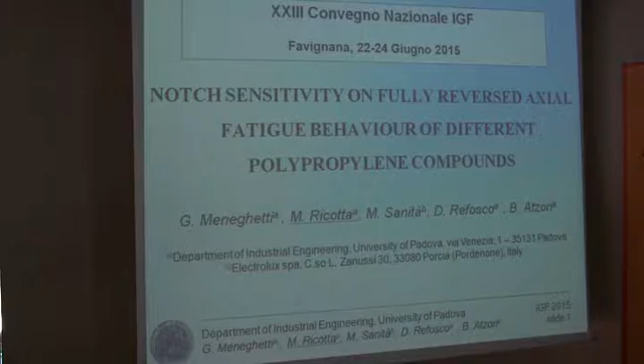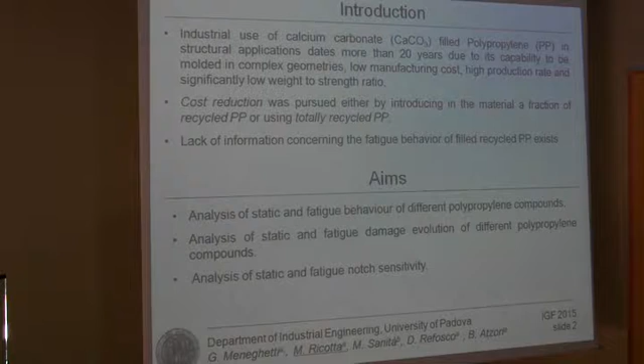The industrial use of calcium carbonate filled polypropylene in structural applications dates back more than 20 years, thanks to its capability to be molded in complex geometry, low manufacturing costs, and so on. Recently, cost reduction was achieved by introducing a fraction of recycled polypropylene or using totally recycled polypropylene.

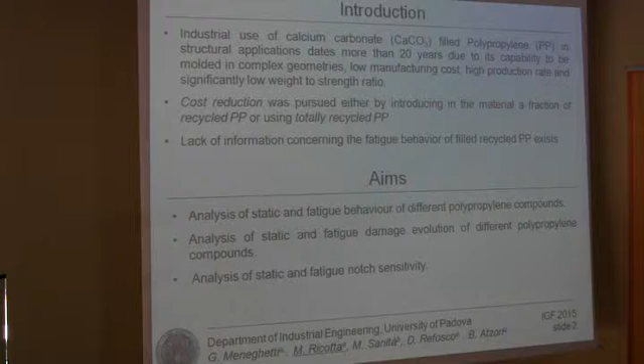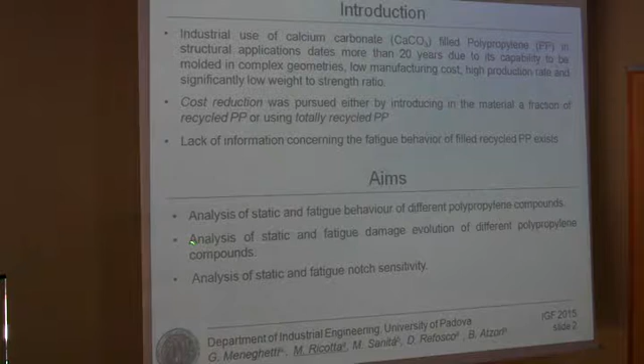However, in the technical literature there is little data about the fatigue behavior of recycled polypropylene. Therefore, the aims of this work were to analyze the static and fatigue behavior of different polypropylene compounds, the static and fatigue damage evolution of different types of polypropylene, and finally the static and fatigue notch sensitivity.

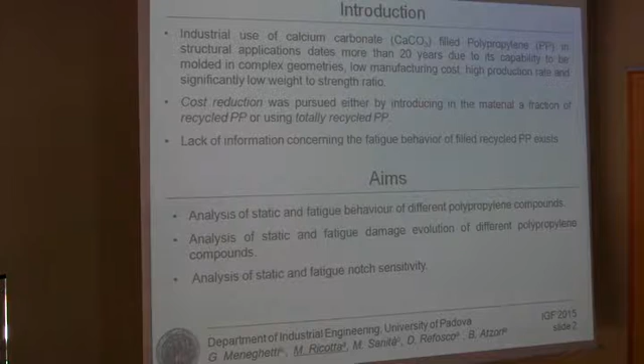Three different materials were investigated: a 42% weight calcium carbonate filled polypropylene, here named EA209; a 42% weight calcium carbonate filled polypropylene adding 25% of recycled polypropylene, here named R2025; and finally a filled calcium carbonate totally recycled polypropylene, here named R2100.

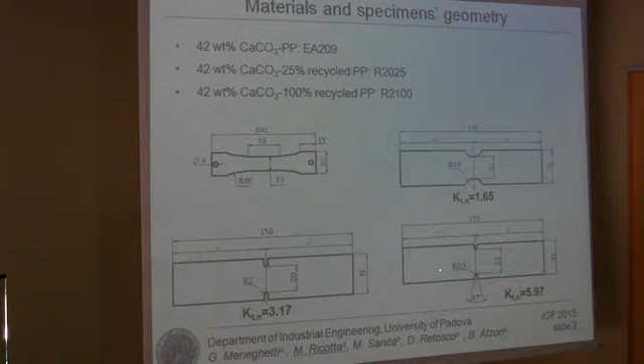The notch sensitivity was investigated using three different geometries: a 10 mm radius semicircular notch, a 2 mm radius U notch, and a 0.5 mm radius U notch.

Test conditions: we performed tensile static tests under displacement control according to international standards, and fatigue tests under load control by imposing a load ratio equal to -1, that means push-pull fatigue.

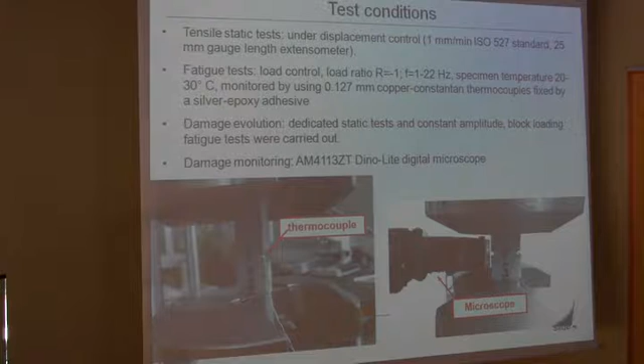The test frequency ranged between 1 and 22 Hz depending on the applied stress amplitude, in order to maintain the material temperature below 30 degrees.

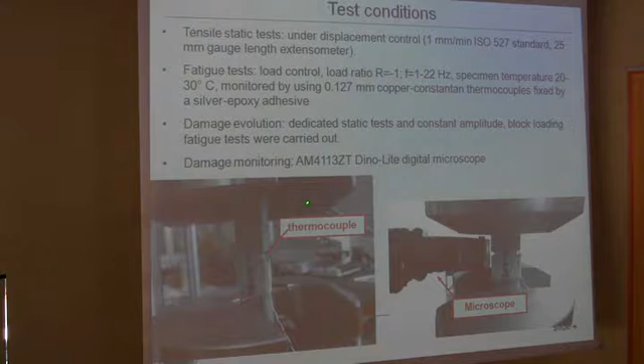The temperature was monitored by gluing a thermocouple at the notch tip, and the damage evolution was investigated by carrying out dedicated tensile, static, and constant amplitude fatigue tests, with damage monitored onboard using a digital microscope.

In this slide we show a typical stress-strain curve, and the main mechanical material properties are summarized in this slide.

We found a 20% reduction in elastic modulus in the case of completely recycled polypropylene with respect to the original filled polypropylene.

The same decrease in yield strength was found, 19%, in the case of fully recycled polypropylene with respect to the EA209 material.

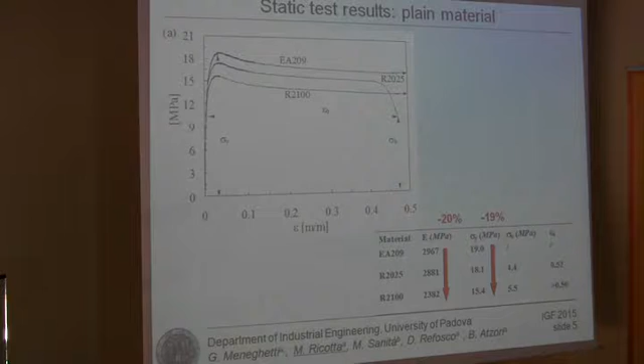This table summarizes the results obtained for notched specimens, keeping in mind that the theoretical stress concentration factor increases to 3.6 when reducing the notch radius from 10 mm to 0.5 mm. We can see that in the case of the first material, the yield strength is practically constant from an engineering point of view.

If we define this simple ratio, the yield strength evaluated at 10 mm with respect to that evaluated at 0.5 mm, this ratio is practically 1.

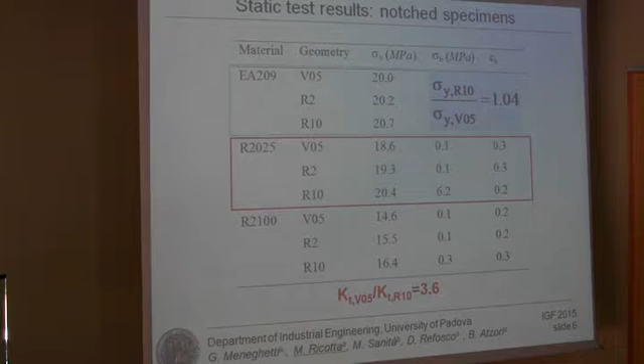Similar results were found also in the case of the R2025 material, that means having 25% of recycled polypropylene, and we can see that the same ratio is equal to 1.1.

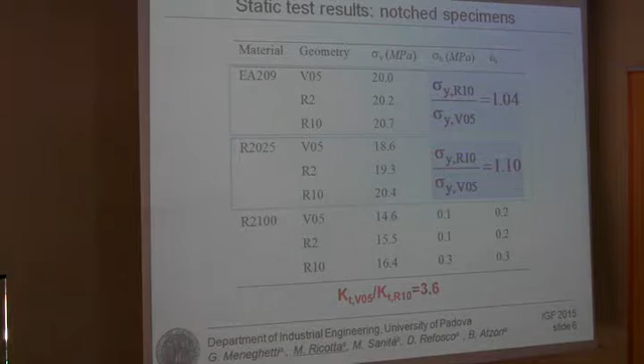Also in the case of totally recycled polypropylene, the ratio was equal to 1.12. Therefore, all tested materials resulted practically insensitive to notches in the case of static tests.

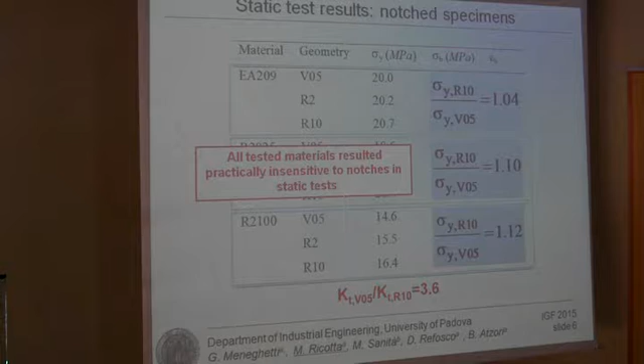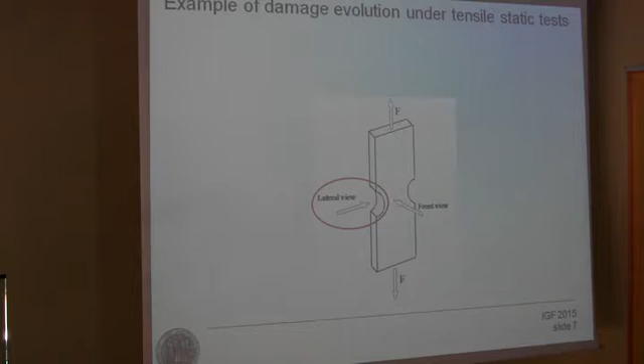In order to understand the damage evolution in static tests, we observed the specimen from two different points of view: a lateral view, looking inside the notch tip, and a front view. We found that the main useful results came from observing the specimen from the lateral view, as shown in this example.

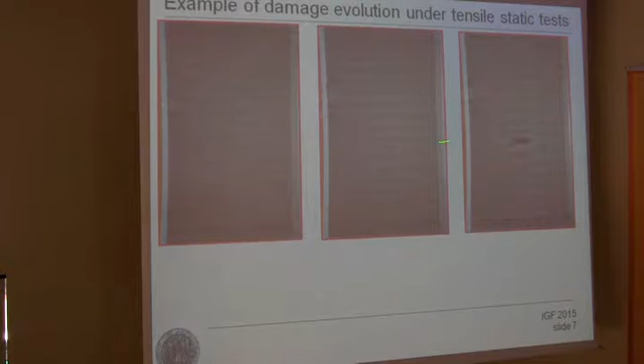This is the completely recycled polypropylene with a 10 millimeter notch radius, showing the notch tip from the lateral view. We can see that damage evolution starts with several small voids, some of which grow and join together to form a single big void.

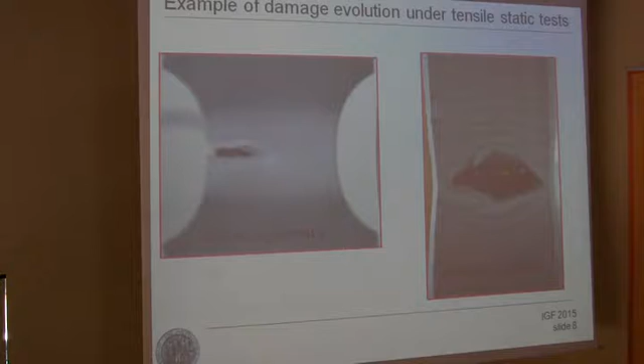As shown in this slide, when the specimen is not completely broken, this big void passes completely through the width of the specimen. In fact, you can see light coming from the opposite side, and this final mechanism, the big void, causes the final failure of the specimen.

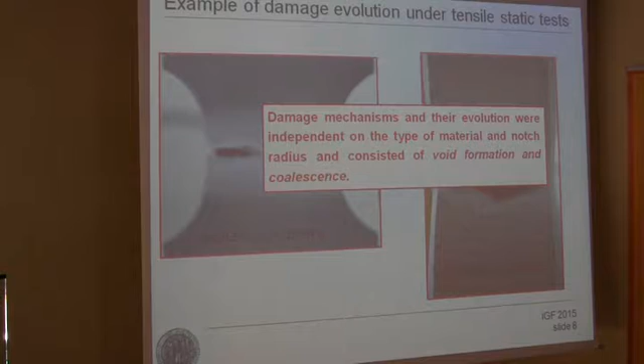This type of observation was carried out for all materials analyzed and for all notches, and we can conclude that the damage mechanism and its evolution were independent of the type of material and notch radius, consisting in void formation and coalescence at the crack tip.

We can see that the unrecycled polypropylene can be analyzed as a single series with the 25% polypropylene, and we have found a reference fatigue strength evaluated at 2 million cycles equal to 11.2 megapascal. Otherwise, the completely recycled polypropylene was analyzed as a single series, and the reference fatigue strength evaluated at 2 million cycles was equal to 9.78 megapascal.

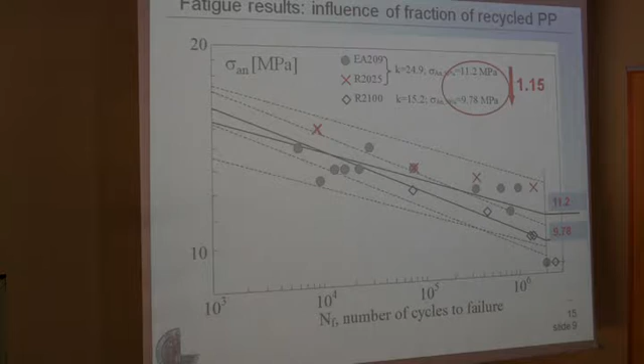Here, the first figure represents the fatigue results available at the moment in the case of completely unrecycled material. We can see that the specimens having 2 or 10 millimeter notch radius can be considered as a single series, while the 0.5 millimeter notch radius, due to the small number of data available at the moment, were not statistically analyzed.

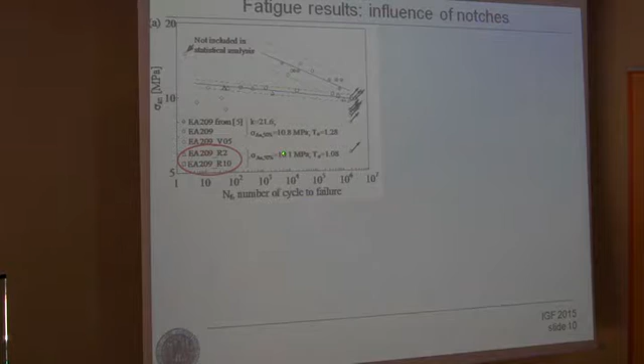At 2 million cycles, if we compare the fatigue strength in the case of plain and notched material, we can see that practically this material is notch insensitive, at least at high cycle fatigue life.

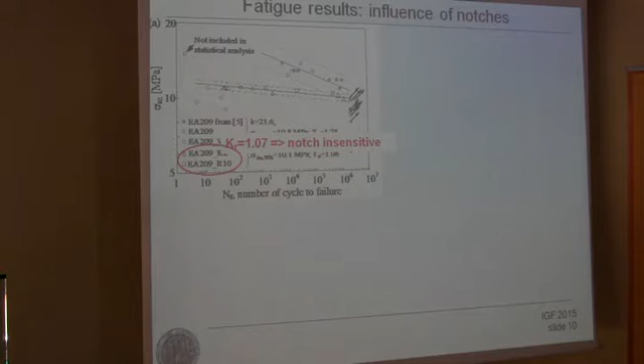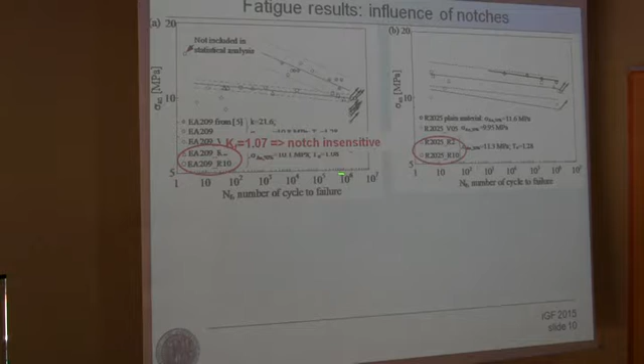Similar results were found also in the case of 25% recycled polypropylene. Also in this case, we have considered as a single series the notches having 2 millimeters and 10 millimeters radius, and we have found a reference fatigue strength equal to 11.3 megapascal. That means a reduction factor due to notch equal to practically 1.

That means also in this case that the material is notch insensitive, while in the case of 0.5 millimeter notch radius, the reduction factor calculated with respect to the plain material was equal to

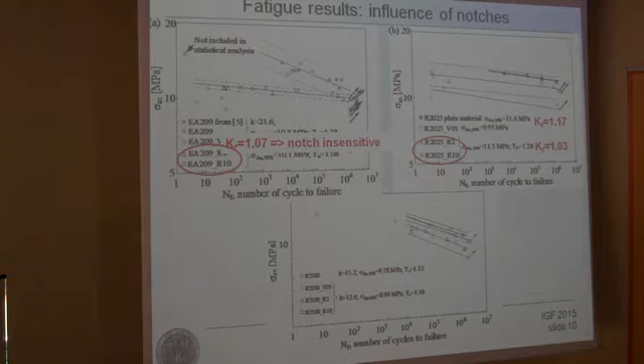1.17. Finally, in the case of completely recycled polypropylene, we can observe that the 3 notches can be considered as a single series from a statistical point of view, and therefore we have calculated the reference fatigue strength evaluated at 2 million cycles equal to 8 megapascal, and therefore we have calculated a reduction factor with respect to the plain material equal to 1.22.

Therefore, we can conclude that in the case of completely recycled polypropylene, there is a small but not negligible influence of notch.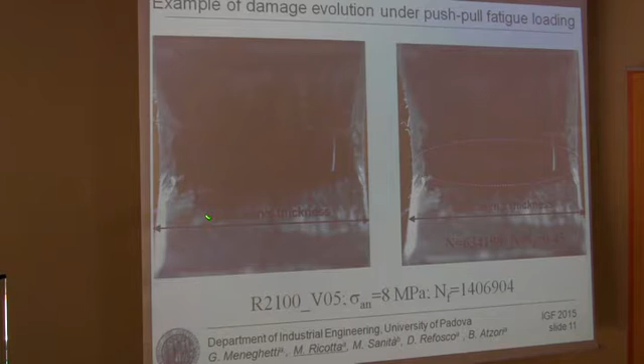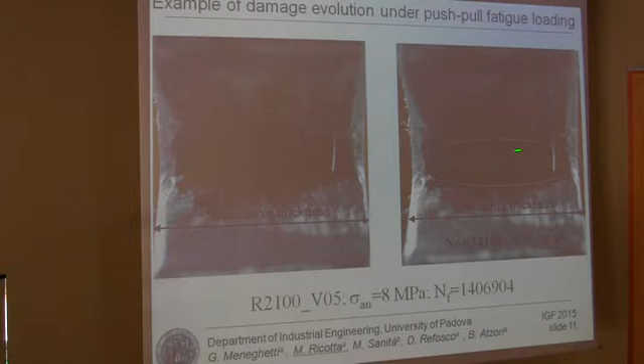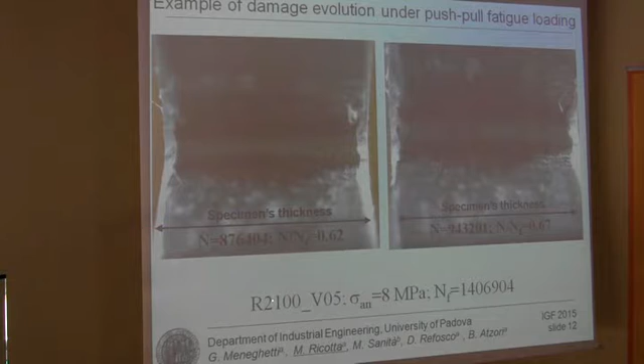This is the specimen thickness. This is the notch tip, and the damage evolution consists of material whitening at the notch tip, proceeding during the test. This is an example in the case of completely recycled material and 0.5 millimeter notch radius.

In the case of high cycle fatigue, we can see that whitening propagates completely through the thickness at about 70% of the total fatigue life.

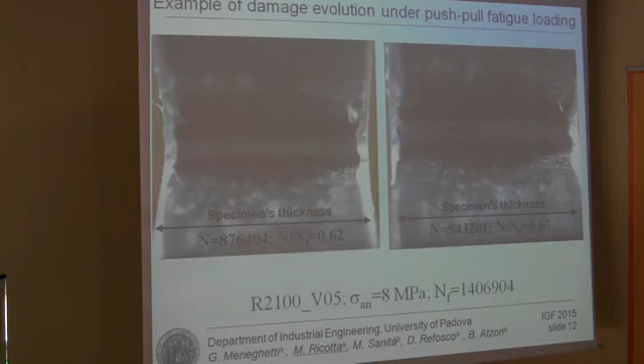We can see the formation of elongated voids in the thickness direction, which propagate mainly through the thickness, and finally there is a sort of big void with area length equal to the specimen's thickness.

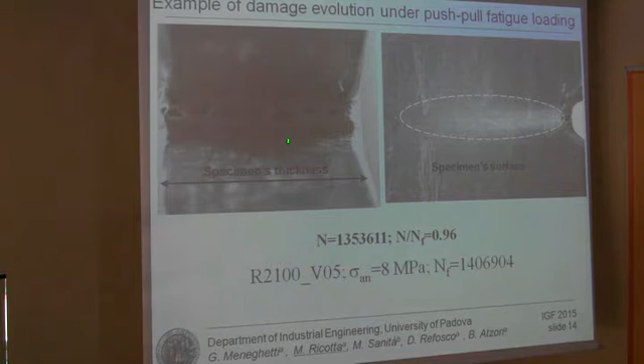If we look at the same picture taken from lateral view and from the specimen surface, we can see that this crack is not detectable from the specimen surface, only a material whitening. Therefore, it's fundamental in order to understand the damage evolution to observe it from the lateral view, because from the specimen surface we don't get the complete idea of what happens inside the material.

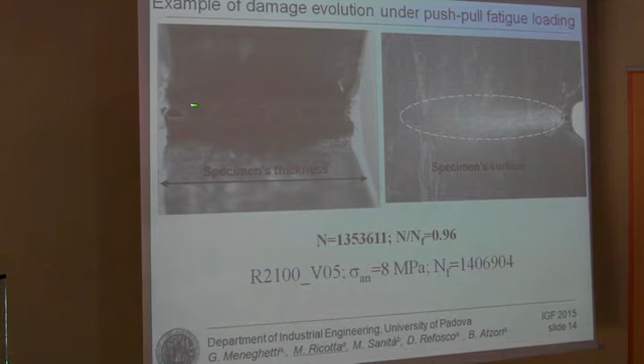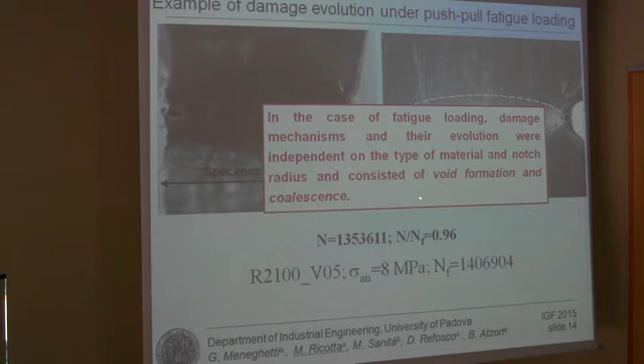We have performed this type of analysis for the three materials analyzed here, and also for all the notches. We can conclude that also in the case of fatigue loading, damage mechanism and their evolution were independent of the type of material and notch radius, and also consisted in void formation and coalescence.

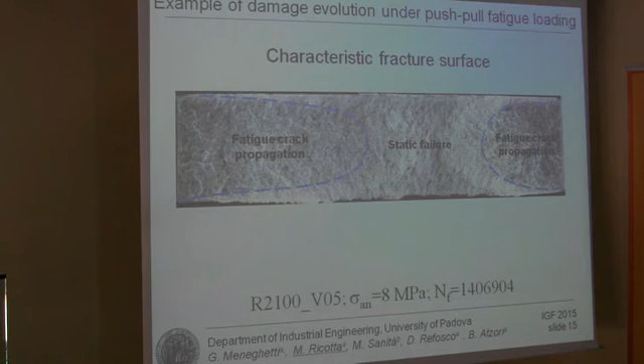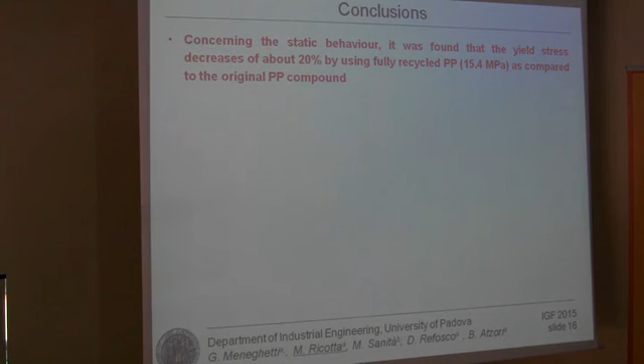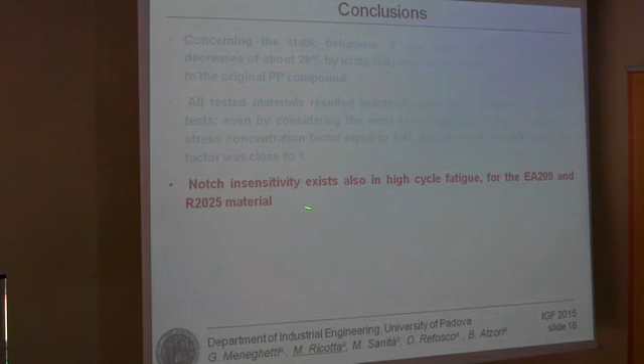Therefore, I move to the conclusion. We can conclude that concerning the static behavior, it was found that the yield stress decreases by about 20% by using fully recycled material with respect to the original compound. All tested material resulted practically insensitive to notches in static tests, and notch insensitivity exists also in the high cycle fatigue regime for the complete original compound and 25% recycled polypropylene.

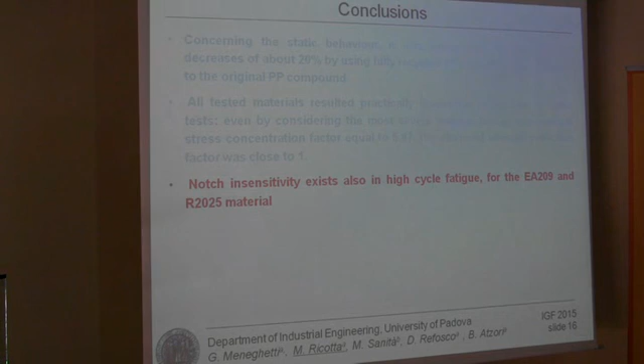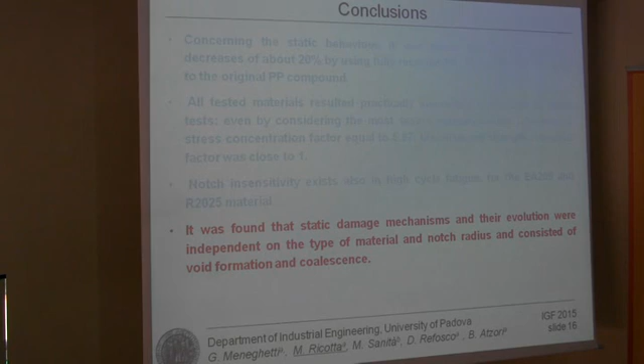It was found that the static damage mechanism and evolution were independent of the type of material and notch radius, and consisted of void formation and coalescence, and the same mechanisms were observed also in the case of fatigue damage evolution. Thank you very much for your attention.